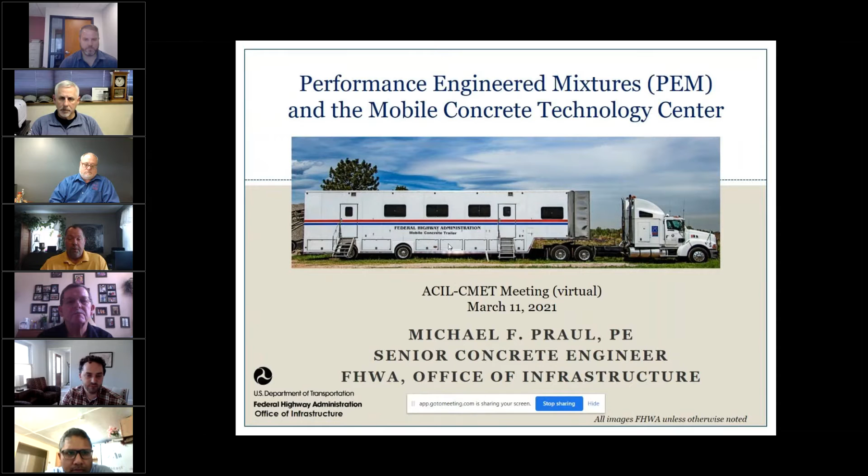As Jeff mentioned, I was asked to talk today about performance engineered mixtures and give an update on what's going on nationally, and also a little bit about what we're doing with the Mobile Concrete Technology Center. I appreciate the interest in the topic, because these two topics together make up about 90% of my job, so the interest is encouraging for me.

We'll start with PEM, and lay a little groundwork on where it came from and what we're trying to accomplish nationally with it. If we look at the evolution of concrete testing, back in the early 20s we got the slump cone, and you can see what cars looked like then. In the late 40s we got the Type B pressure meter, and cars had come along a bit. Then in the early 80s we got the rapid chloride test, and again cars had made some progress. But other than strength testing, these are the tests that make up the lion's share of what agencies do for determining acceptance of their concrete.

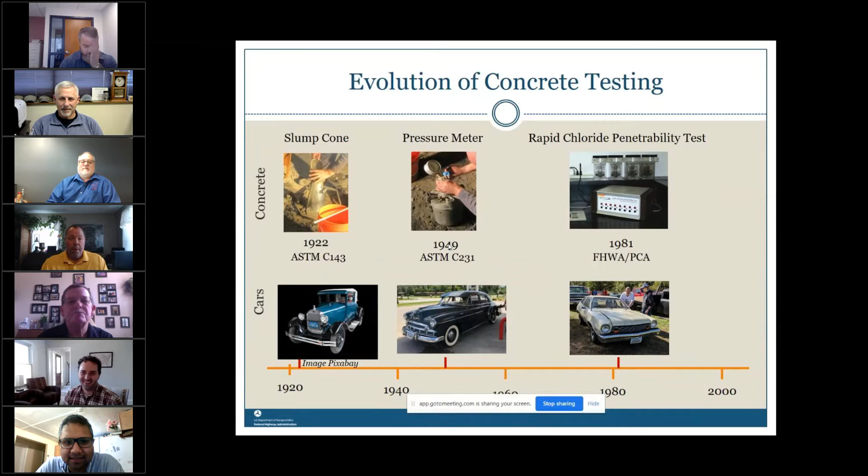Our technology hasn't progressed since the early 80s. What other sector exists this way? Think about what your cell phone looked like in the early 80s, or what your TV looked like. I saw a few faces in the crowd that may share some experience with me being the kid who gets to go up and move the rabbit ears to get better reception. So it's time, and the doors have been opened for us now to evolve concrete a bit, because of new research products that have come from the research community.

What we're trying to do with PEM, as the first bullet says, is get beyond this idea that we determine concrete quality by slump, strength, and total air, none of which has much correlation to long-term performance and durability. We want to work with states and industry to incorporate new tests and technologies that do correlate to service life, and start to design our mixes and base our concrete acceptance on these properties that really do matter.

We want to work with states and industry to develop performance type specifications. As we look at how agency programs will evolve, agency staffing levels have been on a downward slope for quite some time, and that's not going to change. We need to more appropriately rely on engaged and robust QC programs.

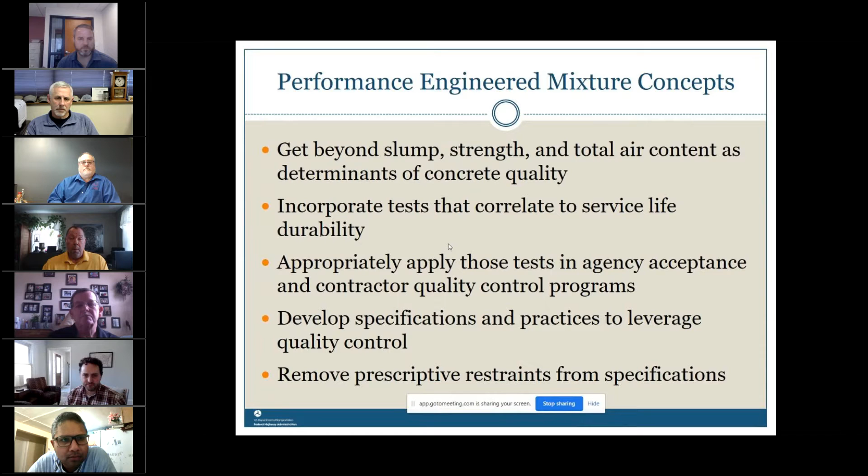So we want to help incorporate these technologies into QC programs, which will then give us the opportunity to start removing prescriptive restraints from specifications and open the door for industry innovation, getting rid of things like minimum cement content in our mixes. That's what we're trying to accomplish.

So this is not a government initiative being forced forward. I think you'll see in some of the examples I show that industry is very much on board with this, and it's a collaborative effort to advance concrete technology. You may have heard of AASHTO PP84, and I wanted to address this because some people think PEM equals AASHTO PP84.

I think the best way to look at it is PP84 is one of the constituents, or a product, produced by the PEM initiative. It's a guide to mix design, and as it says, you're specifying the things that matter. And I lead off with strength.

I just said we've got to get away from strength. It's not a parameter that really correlates to durability. Well, we need to include strength, but we want to take a new look at strength and how much strength we actually need. If we have a 4,000 PSI design, whether a bridge deck, a girder, or a pavement structure, whatever it is, if we need 4,000 PSI, 6,500 is not better. That's really the approach we're trying to pursue as far as the strength side of PP84.

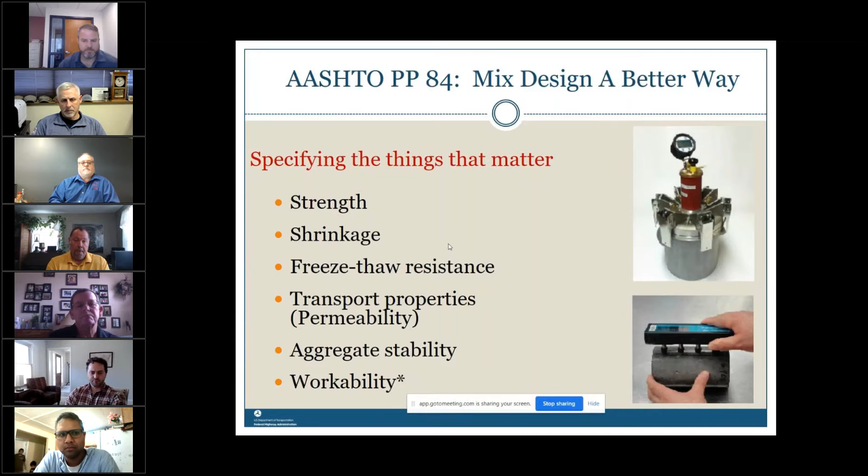I should point out too that it's not just the states in the pooled fund that have interest in PEM concepts. We're working with Vermont, also working with South Carolina. So the fact that they're not in the pooled fund does not necessarily indicate a lack of interest.

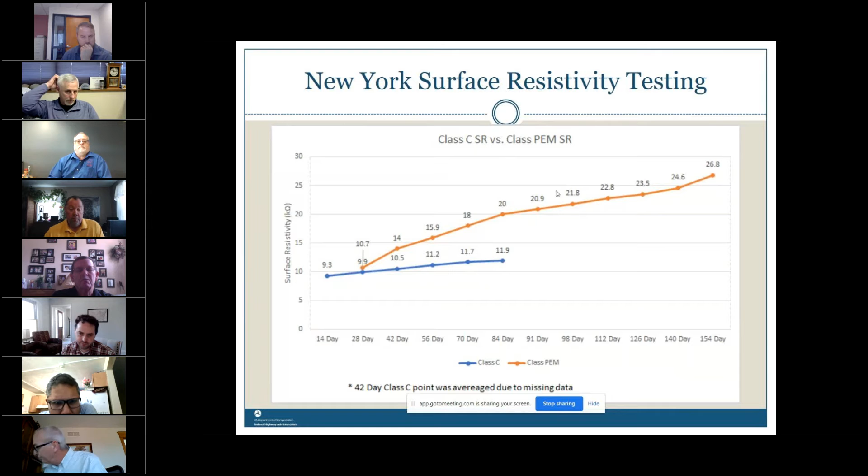And here's just some data. The blue line is the surface resistivity testing for their typical Class C mix, and you can see after about 84 days, it's tapered off right around 12. Compare that to the PEM mix, which out at 154 days is almost 27 and climbing. So you see substantially better performance with these type of mixes.

In Iowa, I mentioned the new workability test. The box test is one of those developed by Dr. Ley at Oklahoma State. This is a very experienced contractor in Iowa that had been paving for years and years and were very comfortable with their mixes. They took a look at the PEM approach and what's in PP84 and relied heavily on the box test, and they were able to take 45 pounds per yard out of their mixes.

Then in 2020, this past year, that same contractor was awarded several other projects, and they came back to the DOT and said, yes, we bid this job under your standard spec, but that experimental job we did, the PEM thing went so well, we'd like to do it in accordance with that criteria, and the state has approved it. So again, when you get industry coming and asking for this change, I think it's an indicator that we're onto something here.

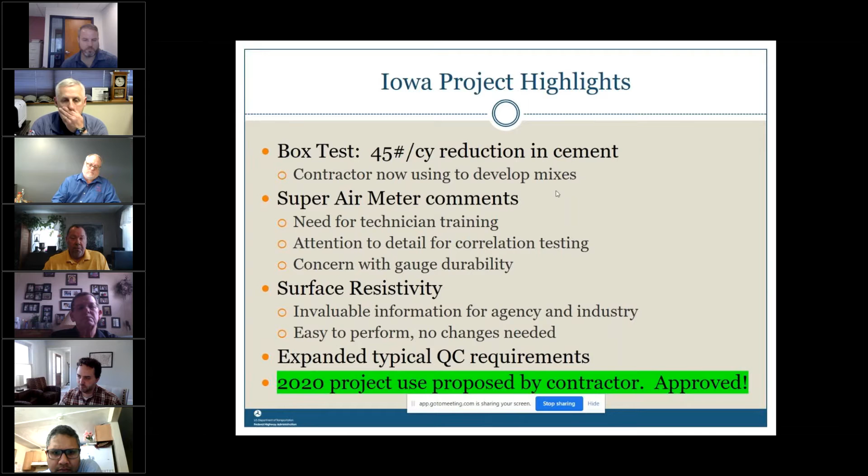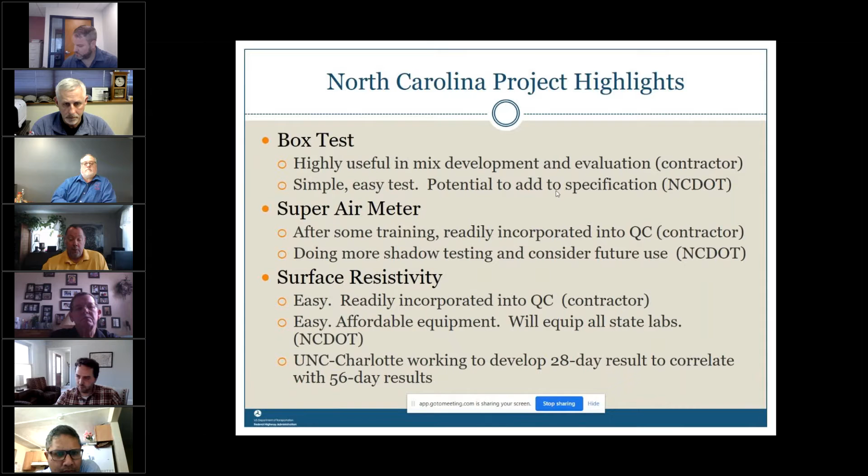Also under surface resistivity, the state has decided, after being exposed to this test and seeing the value in it, they are now equipping all their state labs. We are doing some training for them, and they're working with Dr. Cavalline at UNC Charlotte to develop a specification that meets their needs. And some highlights and quotes from that report - the green highlight, the first one, this is from the contractor, and this was a design build project.

Similar to New York, they had already started the project with a different mix. But after their experience here trying the PEM tests and revising their mixes, this contractor, and we have continued to keep in touch with them, they are now using this approach on their own, regardless of whether states are requiring it or not.

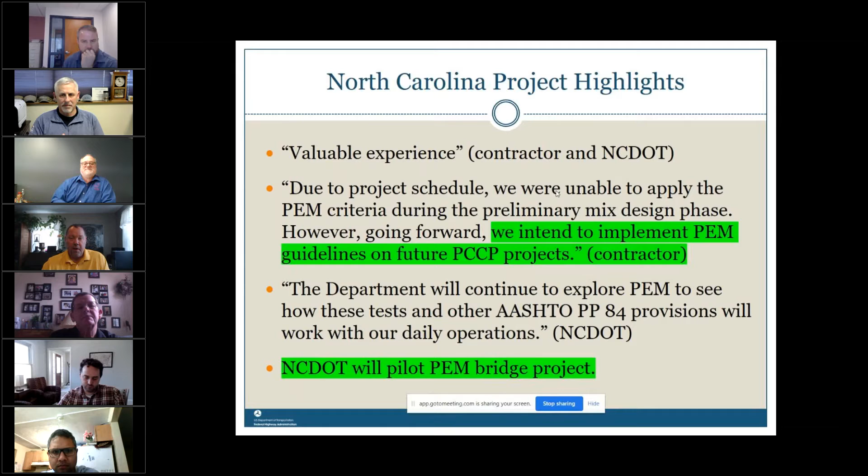I'll jump to the bottom, the state highlight. As with New York, they tried it, they liked it, and they're going to try it on another project. One of the things COVID has brought me is the opportunity to spend much more time with my 3-year-old grandson, and I read him a lot of Dr. Seuss books. I look at PEM where it sits now as kind of a green eggs and ham situation, that people may tend to wrinkle their nose initially, but the ones that take a bite of it seem to like it.

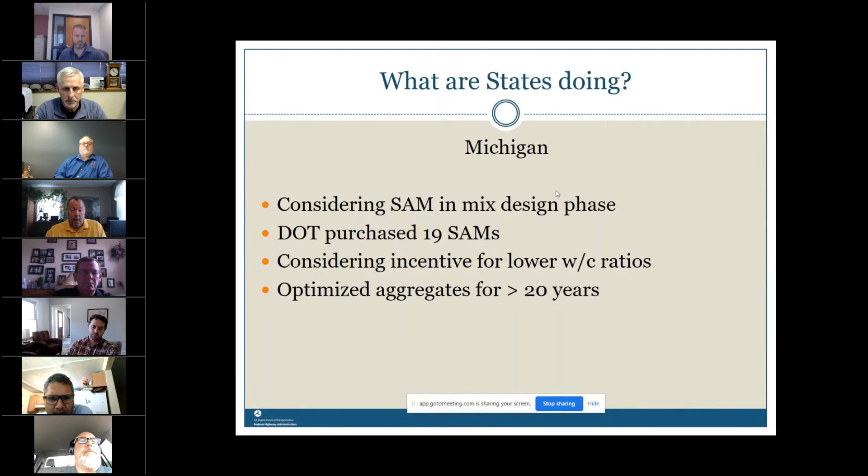Michigan, again similar, out on the front with the super air meter, and they've been optimizing their aggregates for over 20 years. So with that, let me jump to our Mobile Concrete Technology Center program.

Okay, there it is. Got it. Yeah, okay. Mike, can I ask a question? When you say these states are considering the super air meter in the mix design phase—what does that mean? Does that mean they're requiring that the super air meter parameters be run during the mix design phase and submitted?

Yes, and it must hit certain criteria. Whatever limit the state sets has to be met with the mix design submittal. That's what they're considering at this point—that's their first step towards implementation.

Is that then rechecked further on in the construction phase, or have they not gotten to that step yet? I think Kansas, Michigan, and Wisconsin are all close to that and considering it, but nobody has made that leap yet. I believe New York may have done a pilot project or two with just the SAM, unrelated to anything else. I think New York has done probably more actual field work on projects than anybody else.

Okay, yeah, I can tell a little bit about Wisconsin. We've got a lot of experience with that. They did quite a few trial projects utilizing the mix design process, using the box test, SAM, and some other things. And then they had work in the field where the work was done, roads were paved with that same testing.

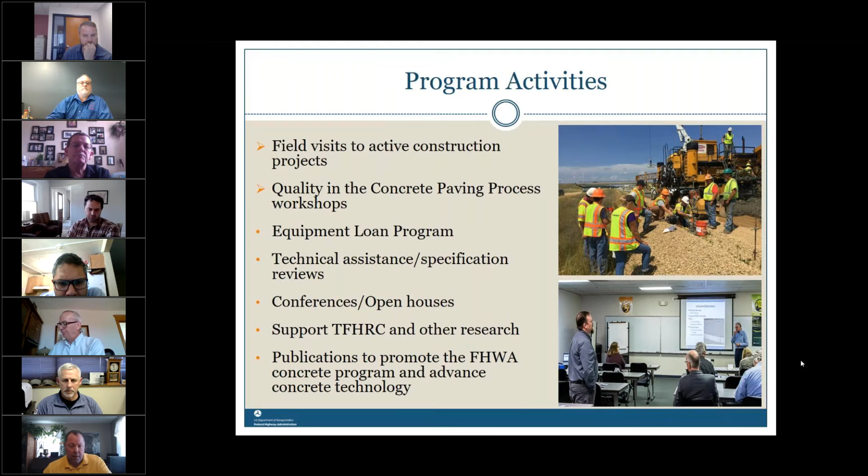In the upper right picture, the gentleman in the white hard hat is Nikolai, my technician, demonstrating the super air meter. We're right out on the project, so we can show folks how these technologies work with their concrete on their projects, which is a lot better than saying, here in Montana this is what we found in Arkansas. I'll talk more about our workshop and our loan program in a minute. The other bullets show some other things we do to help promote concrete technology.

The workshop we have, I think, is one of the real key things we do to help drive change. After we go to the state and do the testing—we're two weeks on their project to demonstrate the technology—then we go away for a few months, do some longer term testing, and put together this two-day workshop that builds off our field visit and spec review.

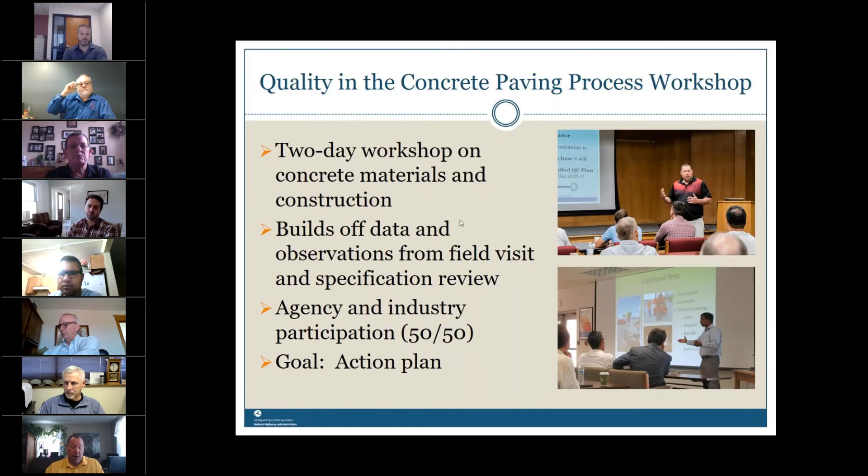This workshop is not a training effort per se. We really want the decision makers and change drivers from the state and industry to participate. We try to come out of this workshop with an action plan saying, based on your materials, your projects, your specifications, and these new technologies, here's where we think you can advance your concrete program. We set up an action plan and move forward, and we continue to work with them.

We got a good example here from the past year with Caltrans. Because they're so big, we did a little more than we normally do—we went to two projects and did three open houses and workshops. But before we came, they let us know there were several parts of their specification they were concerned with and wanted to update, so we developed a testing plan.

We reviewed their spec, developed a testing plan to help support the recommendations we thought we would make, and put that all together. In that workshop, Caltrans and industry developed a working group to update their spec, and they invited us to participate. They adopted our recommendations, and on the first project they tried it on—a $400 million project—they bid half of it with their old spec and half with the new.

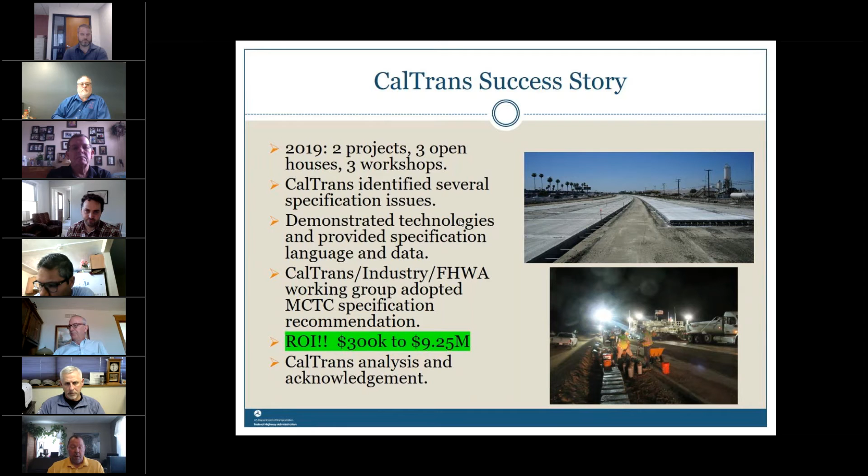They saved $9.25 million. That's a big return on investment because it cost about $300,000 for the Federal Highway Administration for our efforts in California, but on the very first project it saved over $9 million. So again, we like to think we add some value to the concrete community.

There's very little aimed at technicians, and our technicians nationwide do a lot of testing. They're very, very good technicians, so we thought that was a void we could fill. We're in final editing for the first two videos we've done, and we're shooting a video for the third right now. Hopefully we'll be rolling those out very shortly.

We do virtual tours for conferences. We get a lot of invitations to have the trailer set up at conferences, certainly pre-COVID, and we try to recreate that experience virtually now. We've done it a number of times and have hit on, I think, a pretty successful formula with that.

And then for live training, this is something I want to open the door to you all, something maybe you can work with us on. If you haven't worked with us before, I know it's a little unusual to approach someone and say, hey, come give me free training, but that's what we're after.

I'll show you on the next slide, we have about 10 of our technologies that we will do an hour-long, customized live webinar for your organization. We don't do these like, next Tuesday we're going to do a super air meter presentation and everybody can sign up. We're an implementation organization, so we prefer to meet with groups, either individual companies, or sometimes contractor industry associations, or a single state at a time, because we not only want to expose you to the technology, but really have some discussion about how it fits in your program, and how we can move it forward in your program.

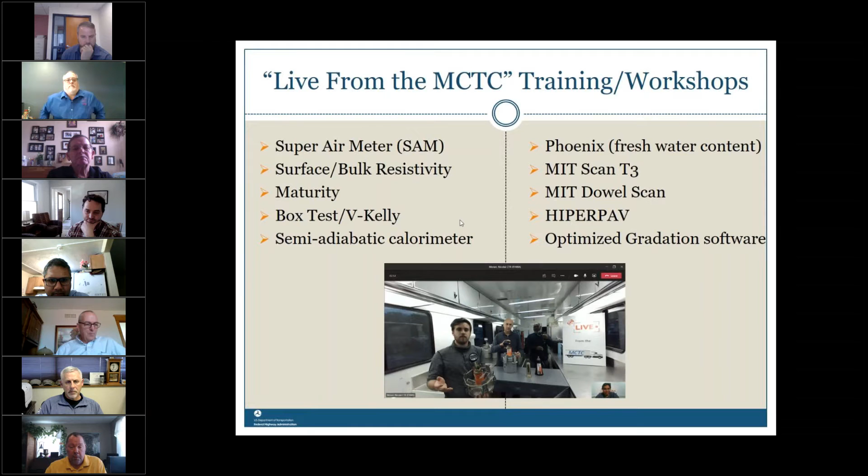Each one is an hour long. Joggin does some engineering level narration remotely, and then Josh leads the on-site discussion. Nikolai actually physically performs the tests, and Jerry handles the camera angles on the backside and the zoom shots. These have been pretty popular. We have a number of them already on our calendar coming up, and we schedule them on demand. So don't be looking for a scheduled webinar, we will schedule it upon request.

We have an equipment loan program. Anybody and everybody, free of charge, could borrow our equipment to try it. We'll train you. I have about $500,000 worth of equipment to loan. Virtually all of it is on loan at any given time, so we just arrange shipping from one borrower to the next. That's something available to you if you want to familiarize your staff with some of the new technologies.

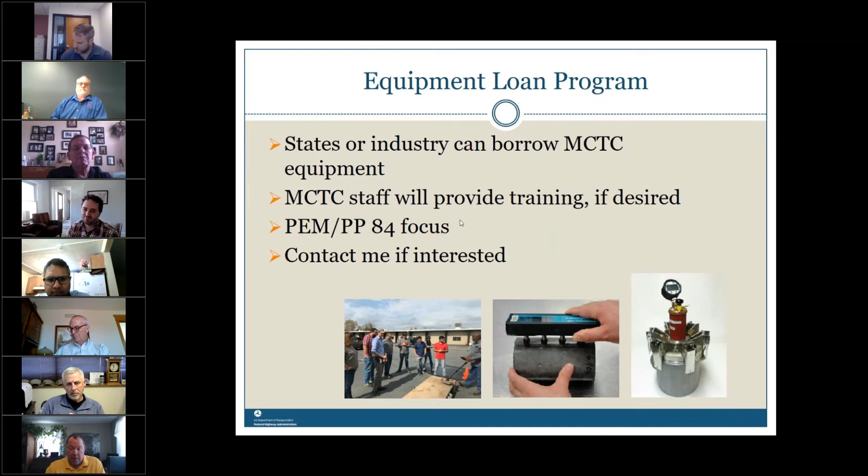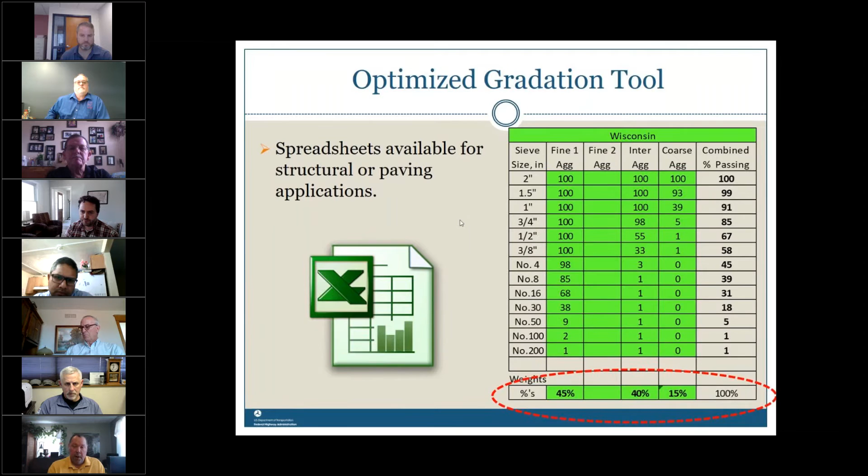The last thing I'll offer you, I mentioned optimized gradation is the foundational concept of PEM. We put together a spreadsheet tool to help with mix designs, and this is an example from Wisconsin. You input your aggregate gradations, and you can play with the blends, and the output will show you the results. The lower left is the Shilstone workability chart, the lower right is the 8-18, and the upper right is the tarantula curve, which is the one we are promoting and endorse.

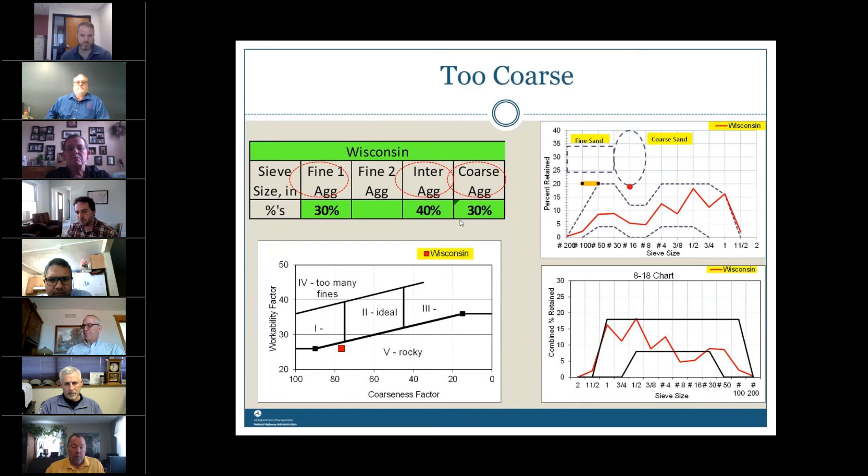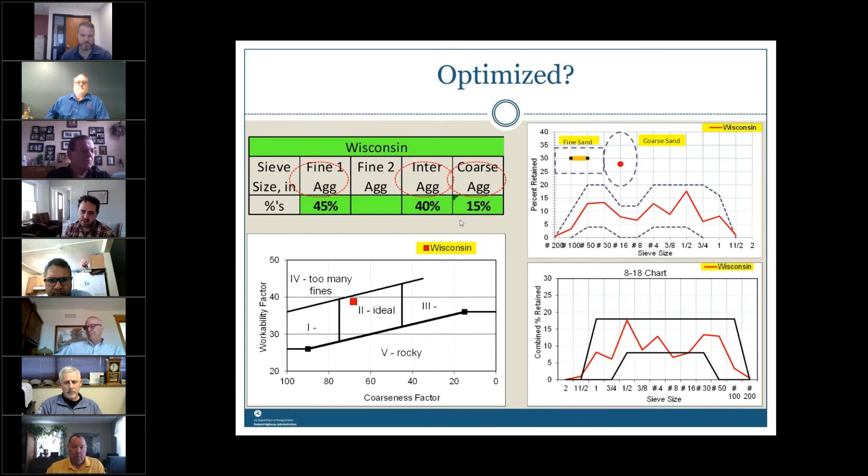In this example, the results show it's too coarse a mix, so you can easily go back, plug in new numbers, remix your blends. Too fine a mix, and just keep adjusting, trying to zero in with the aggregates you have available and the gradations. You can zero in and get the best optimization you can with this tool, again free of charge. Shoot us an email, we'd be glad to send it to you.

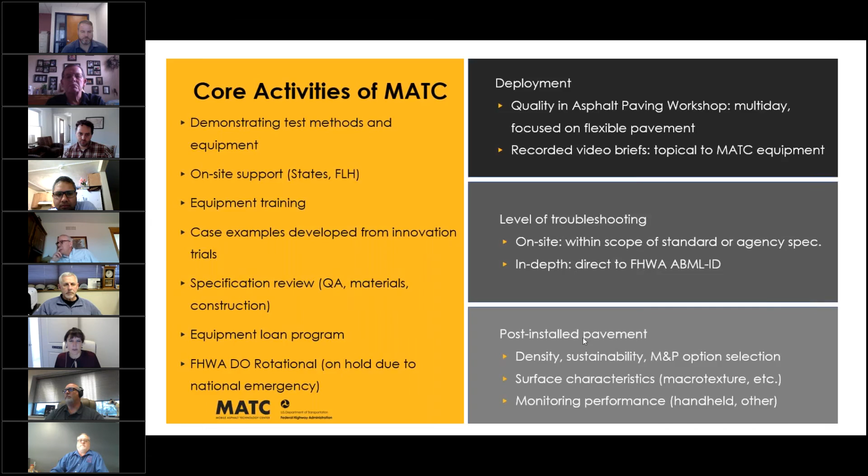One thing is, in previous years we were focused just on asphalt mix and materials, and now we've expanded to also provide technologies for deployment on post-install pavements, looking at things like density and surface characteristics in terms of safety, and monitoring performance during and after construction.

In terms of which technologies we offer currently, this is a listing. We're really categorized into three areas: mixture test, material test, and field test. You can see there are several that we're currently deploying at this time.

Some of these technologies are tested for us at Turner Fairbank Highway Research Center. The Hamburg wheel tracking test is also a mixture test we have done at Turner Fairbank—we don't have that on board the trailer itself. These other technologies we do have on board the trailer. So you can see there's a variety of things we can do in terms of performance testing that support the balanced mix design approach, as well as more in-depth approaches like performance engineered pavements.

We have materials tests that look at binder, pavement markings, and aggregates—looking at the quality of those before we get into a mix or before installation on the pavement. Our field tests include things like identifying thermal segregation, getting in-place pavement thickness as opposed to taking so many cores, and also the circular track meter and the laser-based AIMS device, which give us the mean profile depth to estimate macro texture—that's looking at safety of the mix in terms of skid.

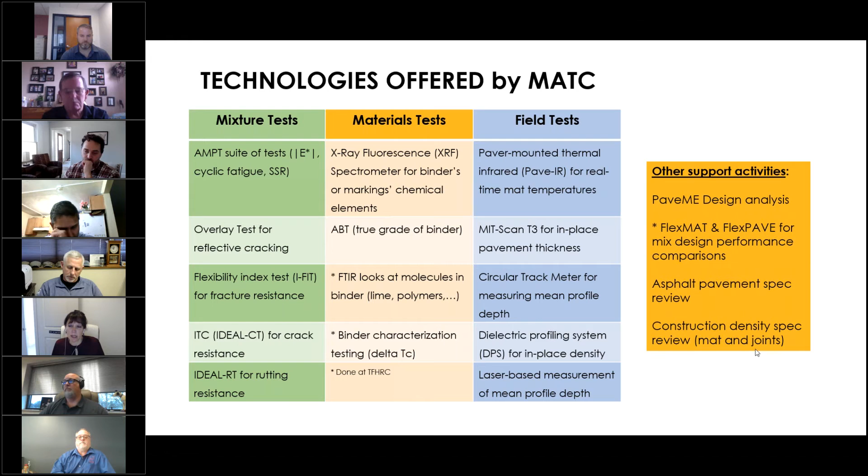We also have these other support activities in terms of bridging into pavement design, as well as, as I mentioned before, spec reviews. A lot of people right now are looking at their density specs, especially longitudinal joints, and that's something we can help provide an independent view of as well.

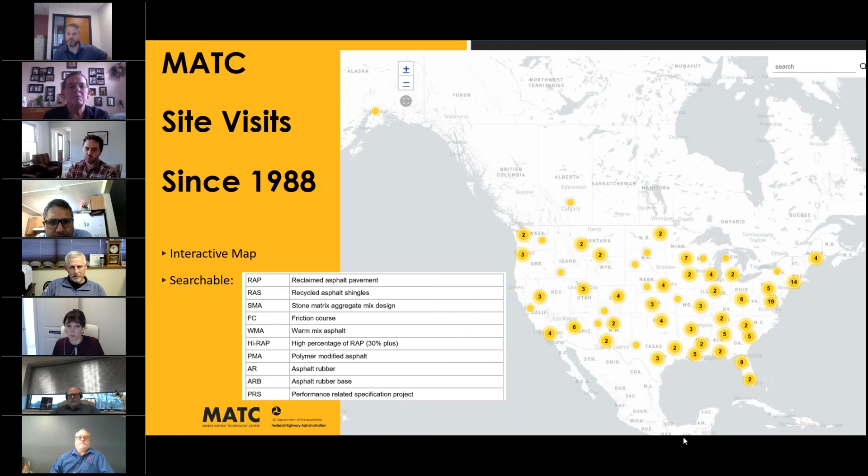That can be helpful, especially when people are wondering, can we get data? We do have some data from past projects. As technology changes over time, it's become easier to keep that data. So that's a big emphasis right now, coming up with a new way of storing the data and transferring it to our long-term infrastructure program, or LTIP, formerly known as LTPP, so they can take that data and make it publicly available. That's what we're working on now, pulling in the field data and everything else.

This gives you a little bit of logistics. It takes us about 6 months to plan a site visit. This is just a listing of the steps, but the key feature is really having a smaller kickoff meeting that defines the scope of our visit.

Then we have an open house, which is something in particular for your group. I'm hoping there's a connection we can forge here through Jeff to let you know when we're in the state where you're located, or where you may have colleagues located, so they can come out to the open house. When we can actually travel again, we're going to be a lot more creative. Even if things get back to normal, we're going to use this virtual option.

So we kind of have hybrid open houses, making it possible for people anywhere in the state to join virtually as well. Typically it's 2.5 to 3 weeks. We're often hosted at the asphalt plant, whatever contractor is building the project we're set up on via the state. Then we have a closeout meeting and a closeout report.

With this closeout, we typically try to shoot for returning that back within 90 days after our site visit. This is really going to culminate in the future, just the same way Mike explained the concrete program, into a 2-day workshop on quality in the asphalt paving process, and the final results will be included as part of that training.

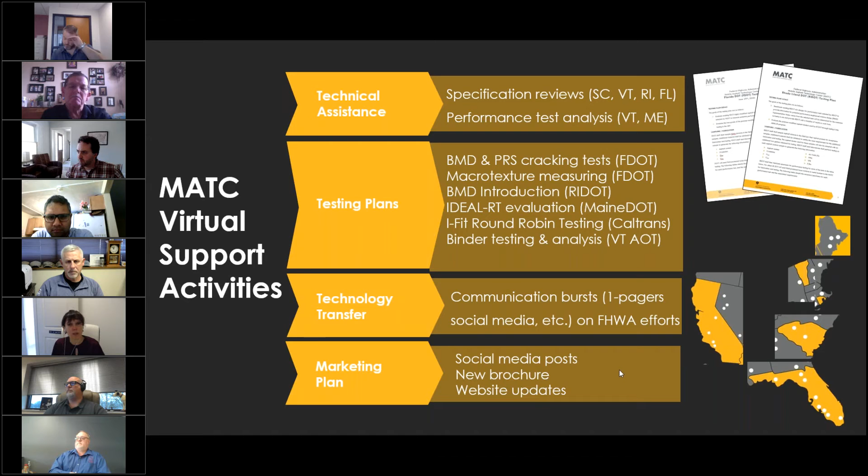Mike's program and my program are both trying to do better at getting the word out. This opportunity today is one of those great things where we can tell you what we're doing and see where we might be able to help you or fit in.

This gives you a sense for what we produce. We put together a formal testing plan for each site visit. Some of the key features of the visits we had this year: Rhode Island DOT wanted a full introduction to the tests that are part of the balanced mix design approach, which has been catching steam the last couple of years.

We're trying to move away from entirely prescriptive specifications and get more into at least some sort of index-based or indicator-based test results. We did a project for South Carolina looking at ultra-thick lifts, where they were placing their lift in 5-inch passes and then compacting to 4 inches. They also had a combination of warm mix, high RAP, and high PG, so it made it pretty interesting.

Maine DOT, for example, we were doing a macro texture evaluation for some of their dense gradeds, as well as in South Carolina and Florida. And then we participated in a Caltrans public-private partnership round robin on their I-5 project.

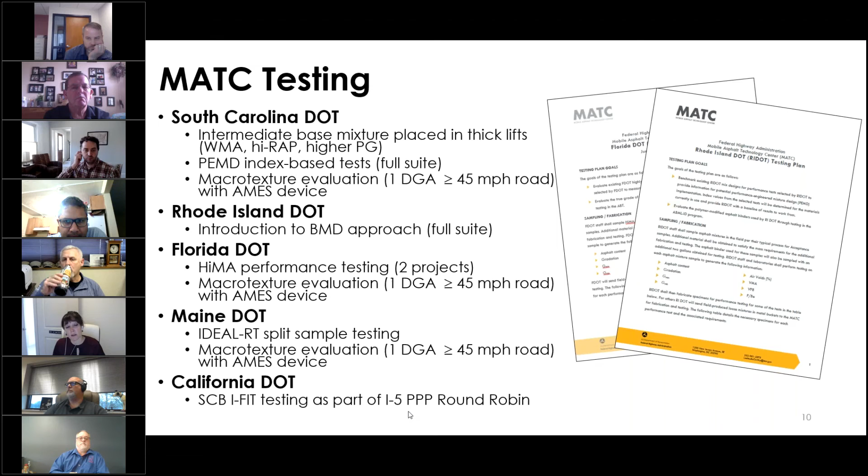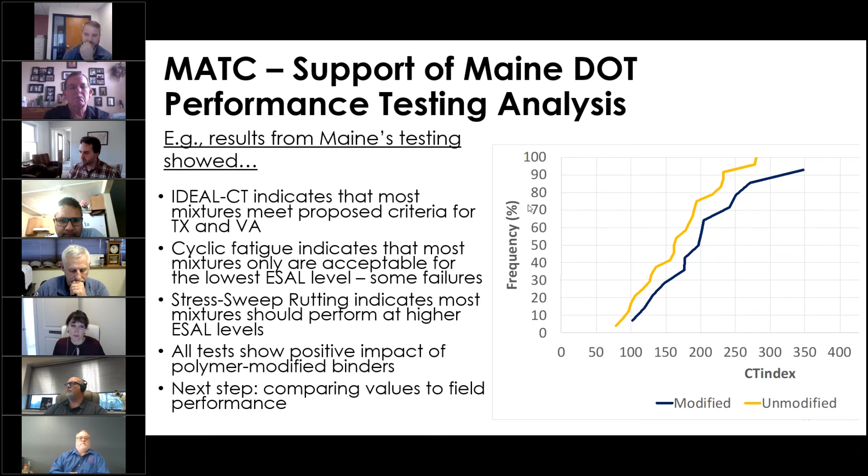This just shows how we were able to support remotely through doing performance test analysis, to see what Maine could take away from the testing they had done, in this case with one of those indicator-based tests, the ideal CT. And that's also led to some other questions that they wanted answered, and we're trying to continue to support them.

We do provide additional technical assistance through Derek Nener-Plante at the Resource Center, and so we work very closely together to try and broaden the impact that our program has.

We've produced one-pagers. They're pretty simple. You can find them on our website, and they talk about these different technologies that we're deploying in the MATC, not just the mixture testing, but the field and materials tests as well. So all the mixed test one-pagers should be up, and hopefully the materials and field ones will be up in the next month or so.

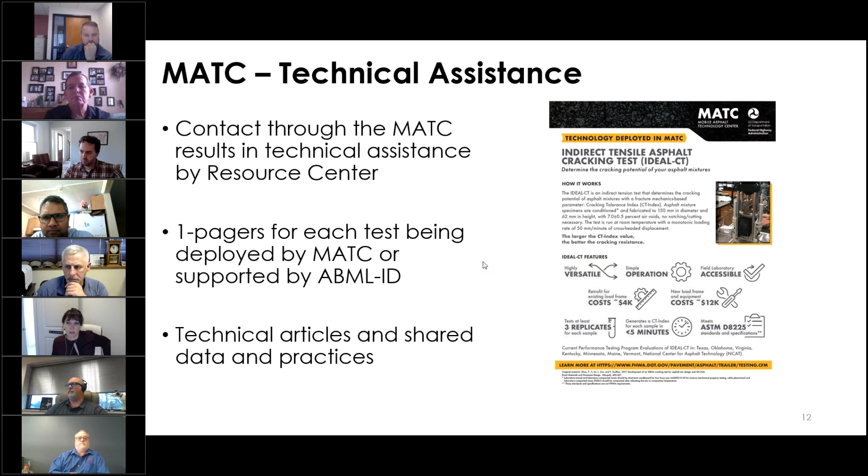Over time, we'll also provide links to other technical articles. For example, we have a link on our webpage that goes to some of the density initiative one-pagers that we wrote to support the tech briefs that were put out recently. You can see an example here: enhanced in-place density, why is it so important? It's really just an overview, a one-page thing that catches your eye, and something easy to take to leadership in your organization.

We also have another series of one-pagers that will very soon be on our website, spotlighting pavement density through the use of the dielectric profiling system. We've concluded a little series on Ohio DOT, and we're in the middle of writing one for a spotlight on Minnesota DOT. These will be forthcoming as well.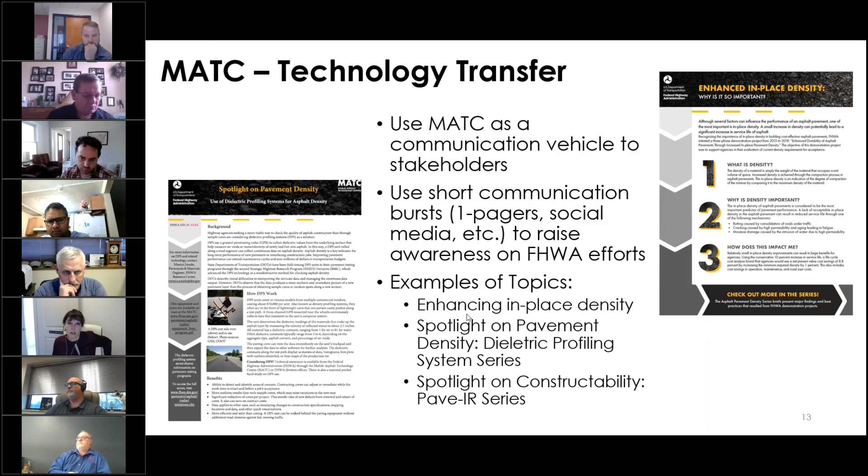Our DPS so far, the dielectric profiling system, has been really popular, and we're actually in the process of buying additional units because we've got a pretty big backlog already of states requesting them. One of our units is now in South Carolina with a contractor, actually with Eurovia, and South Carolina DOT has been out almost every day, also checking out and working with the technology.

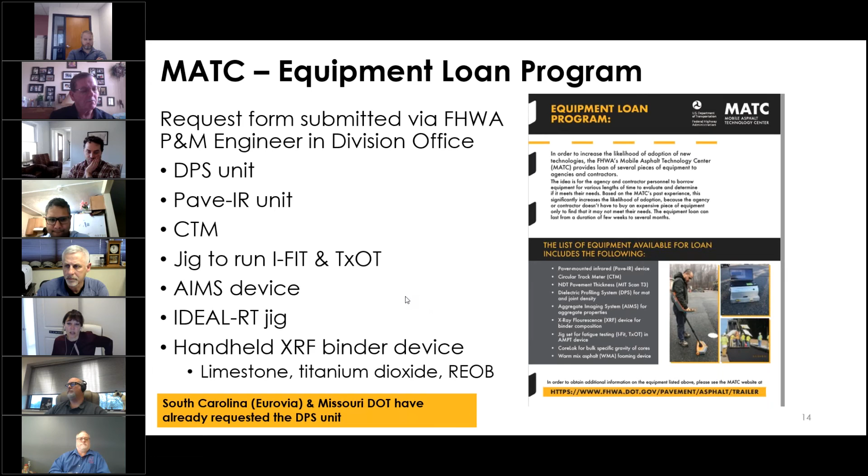Missouri DOT has our other unit. Because we're in this virtual environment, our third unit is actually with a consultant up in Minnesota, and they are responsible for doing the training, because we've actually gotten to spend very little time with our own devices. We wanted to get those out to the states as soon as possible. Hopefully we'll have our own device soon, and hopefully this will be something where we can be on site and helping to teach on.

We have a 2-day workshop under development right now. It should be ready by early fall, and it's an in-person workshop, so until we're able to travel, we won't be able to hold these. The idea is that we bring both industry and agencies together, and hopefully folks like you might be involved in this workshop when it comes to your state as well, to go back to basics and talk about asphalt quality, and hopefully stem some ideas based on the MATC visit of things you may want to try in your state.

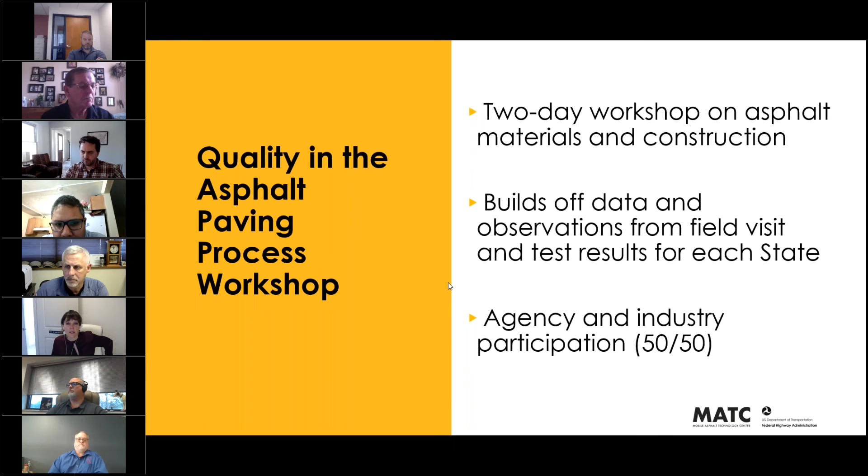We have our webpage, and it's going to be updated quite a lot in the next 6 months, so feel free to jump in and have a look around. And with that, I'm concluding. We do have a brochure that hasn't been uploaded to our webpage yet, but I can email that to you if you're interested, so you can see a little bit more about our program. Thank you.